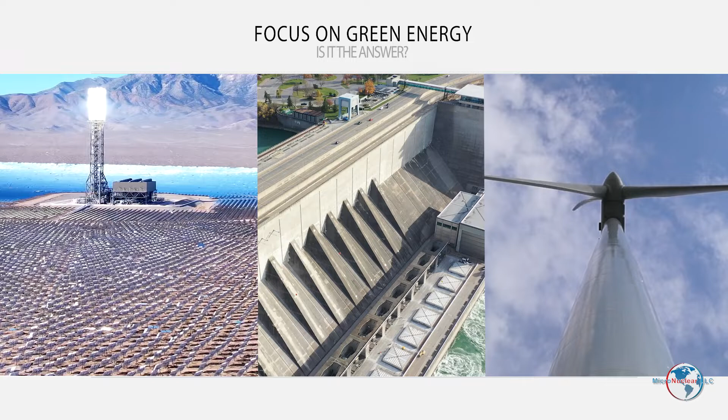Energy. The last several decades have witnessed a tectonic shift in the discussions of how we ensure the future of our energy supply. Today's media is focused on green energy as the answer to the elimination of fossil fuels. The public's perception of the viability of this green energy is often driven by political agendas, misinformation, and climate change focus that promote scientifically unattainable goals.

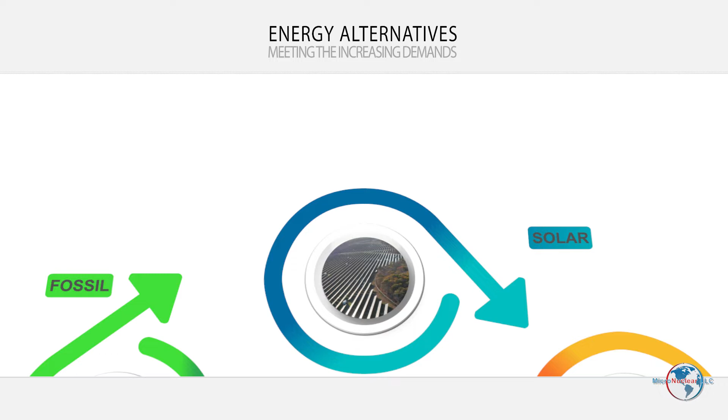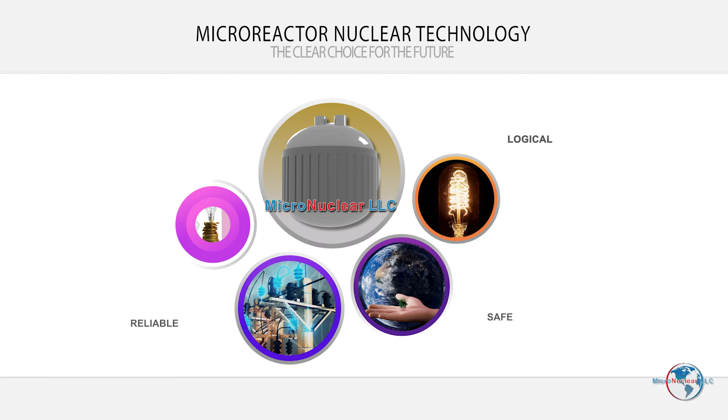When we examine the current realities of all forms of energy production, it becomes clear that only one technology has all the capabilities to meet the increasing demands of our planet: microreactor nuclear technology. This new type of reactor, from America's MicroNuclear LLC, employs a molten salt nuclear battery that, in a few short years, will be supplying a logical, safe, reliable, and economical solution that also resolves the issue of nuclear waste disposal.

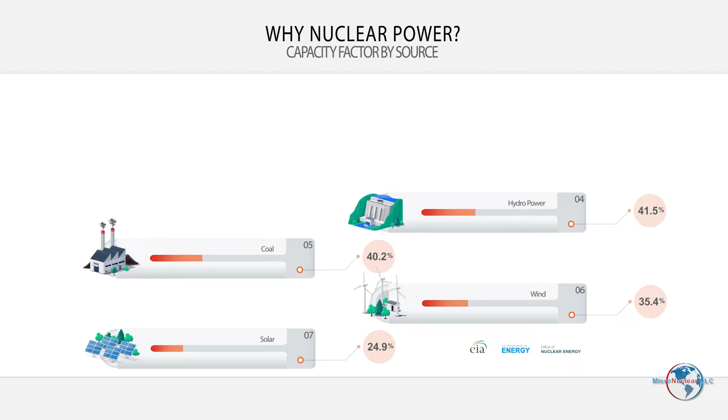To understand how transformative molten salt nuclear battery technology is, it is important to look closely at the specific requirements of competing technologies in their attempt to reach a goal of reliable, emission-free, environmentally friendly energy that is sustainable, reliable, and affordable. Capacity factors of these different technologies vary greatly, but none comes to the capacity of nuclear power, which is by far the most reliable and efficient.

The environmental and societal impact of generating facilities is massive. For example, a wind farm requires over 2,700 acres, while a solar farm can demand over 500 acres to produce the same 10 megawatt output as a quarter acre facility that houses a molten salt nuclear battery.

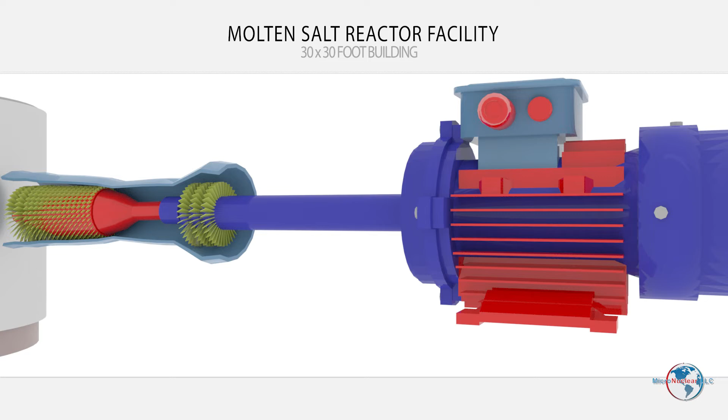This is possible because the reactor vault and the commercial load equipment can be contained in as little as a 30-foot by 30-foot building installed above or below ground.

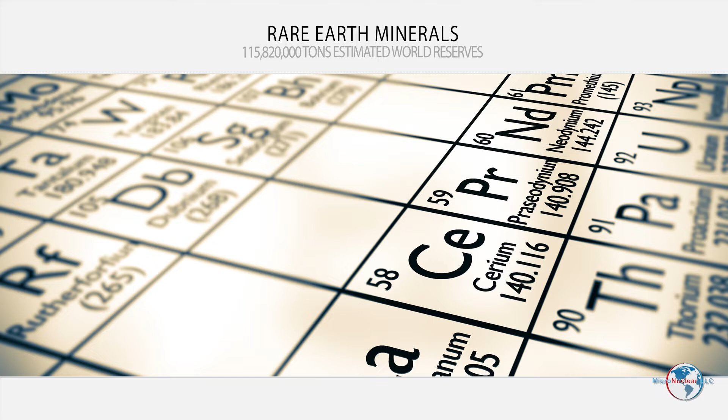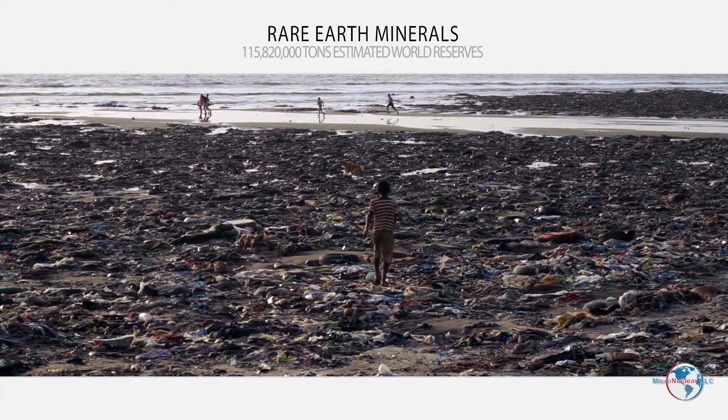Additionally, the reliance upon foreign sources for rare earth elements for battery production means energy security can be severely crippled by geopolitical events, while mining practices produce environmental and humanitarian crises around the world. The examination of all these facts make the conclusion of the importance of nuclear power undeniable.

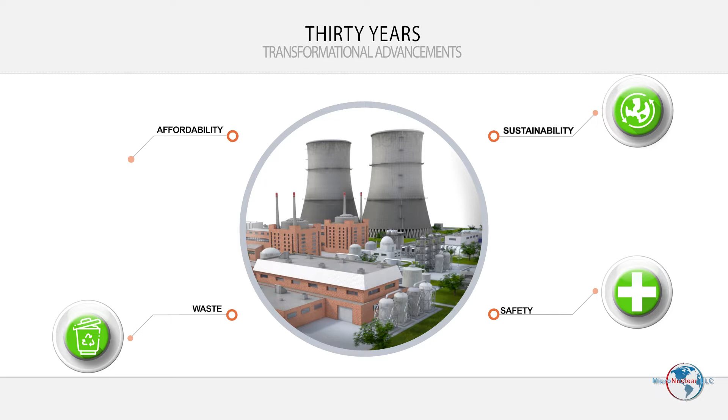But for over 6 decades, the perception of nuclear energy has remained unchanged, as the U.S. has failed to take advantage of the transformational advancements made in nuclear power science and technology over the last 30 years. The molten salt nuclear battery from MicroNuclear LLC will alter that course.

At MicroNuclear, our primary objective is to revitalize and secure our energy needs using proven and safe technology that not only solves our existing energy needs, but opens an essentially unlimited potential to advance the security, reliability, and availability of our future energy needs.

Molten salt nuclear reactor technology is not a new concept, but one whose feasibility has been proven for decades, and the recent re-examination of that concept by MicroNuclear provides innovative design solutions that will change the entire energy infrastructure. To easily understand the difference between the molten salt nuclear battery and the traditional nuclear power plant, let's look at the operating flow chart of both systems.

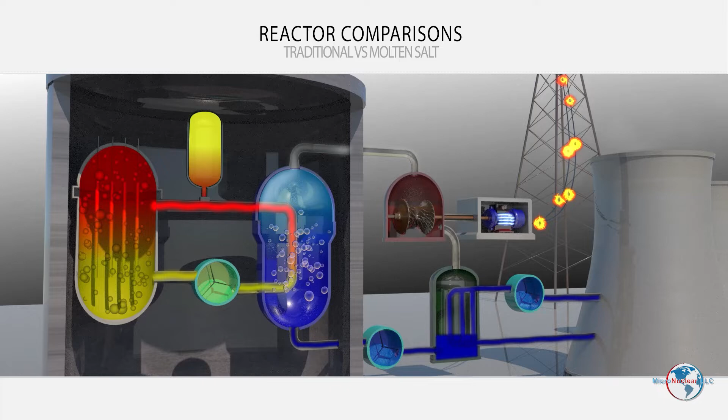Traditional and current nuclear power plants are referred to as light water reactor systems with several components, including a solid core reactor, pressurizer, coolant pumps and loops, steam generators, turbine generators, cooling towers, and more. These systems can reliably generate large amounts of electricity. 1,000 megawatts are not unusual.

But those power plants require a large amount of land to do so, along with a complex operating system and support resources, many operational staff, and are very expensive to build and maintain. Light water nuclear reactors are safe and reliable. However, they do produce questions of its sustainability with radioactive water, expended core disposal, and nuclear waste.

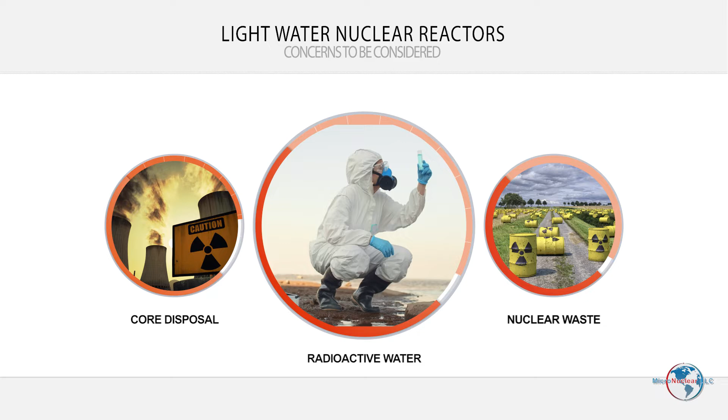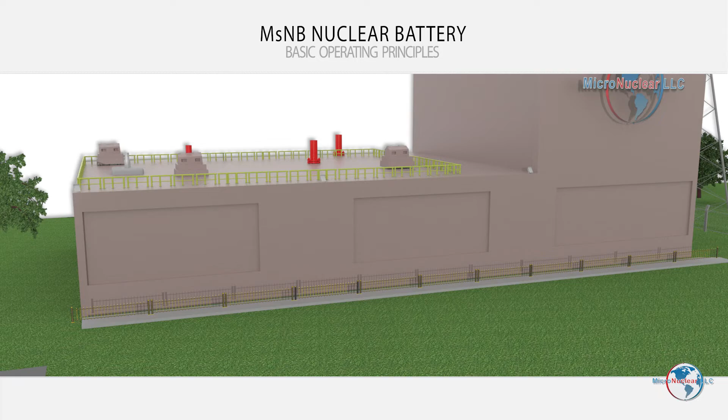Molten salt technology addresses, solves, and reverses these conceptions. The basic operating principle is simple. The reactor core of the molten salt nuclear battery, or MSNB, is, as the name implies, a molten mix of nuclear fuel and a chemical salt.

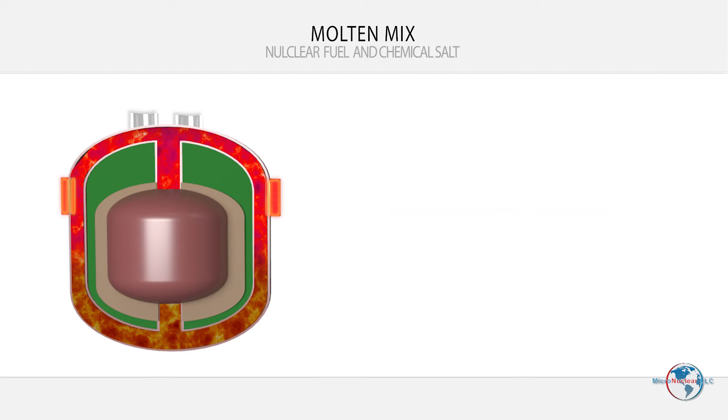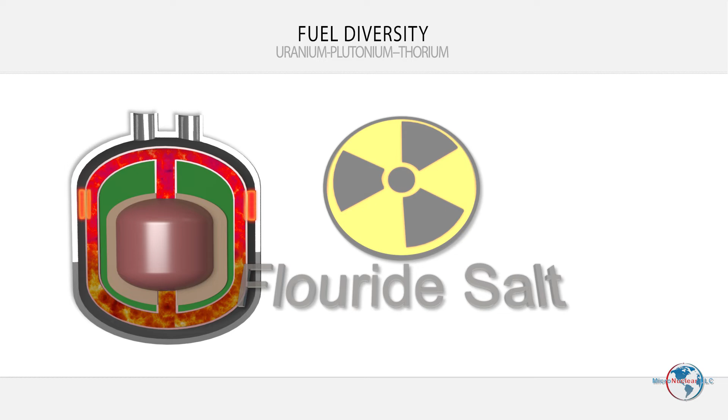The salt in the MSNB is not your sodium chloride table salt. Instead, the MSNB uses fluoride salt because of its desirable characteristics when mixed with a nuclear fuel. As for the nuclear fuel in the MSNB, it can use either uranium or plutonium, and it can also run on fuel provided by thorium.

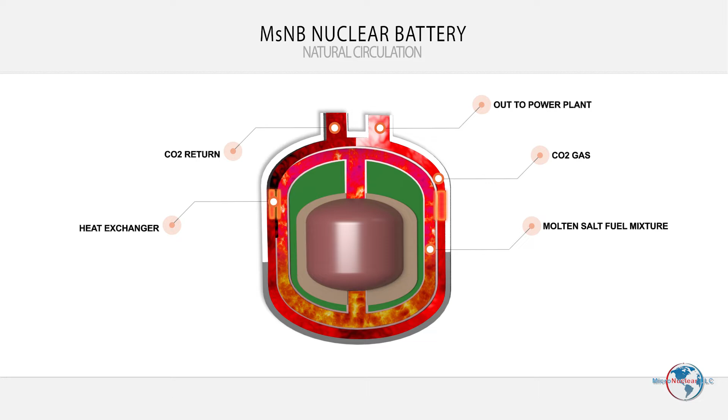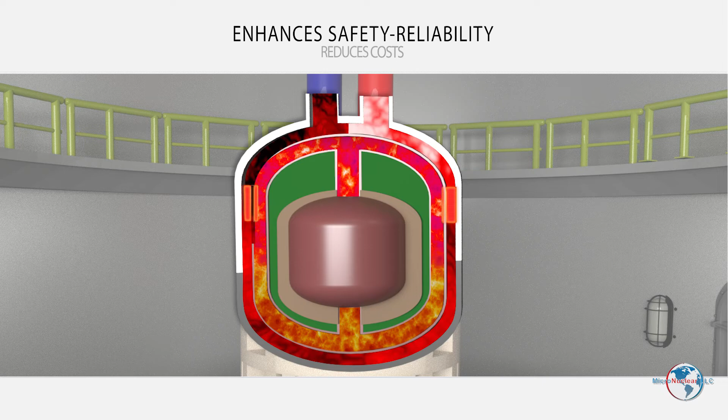Most importantly, the MSNB uses natural circulation to move the molten salt fuel through the reactor core and is thus designed without the need for pumps, valves, or coolant loops. The elimination of each of these components enhances safety and reliability while it reduces cost.

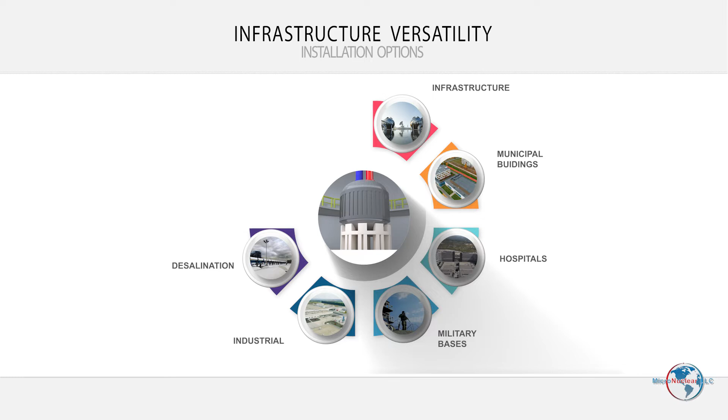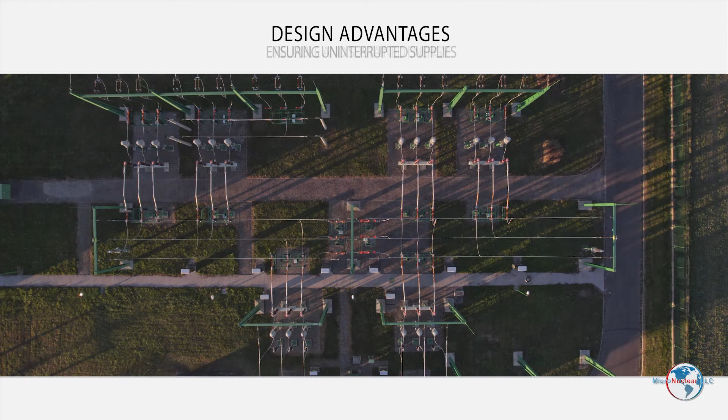It can be installed in critical infrastructure such as municipal buildings, hospitals, and military bases. It is ideal for industrial applications, desalination facilities, hydrogen production, and remote villages. The MSNB is designed to provide reliable and sustained energy, securing the absolute requirement of uninterrupted supply of energy.

Additionally, the MSNB development is mature. It is ready to produce the first prototype, be fueled with molten salt, and undergo operational validation.

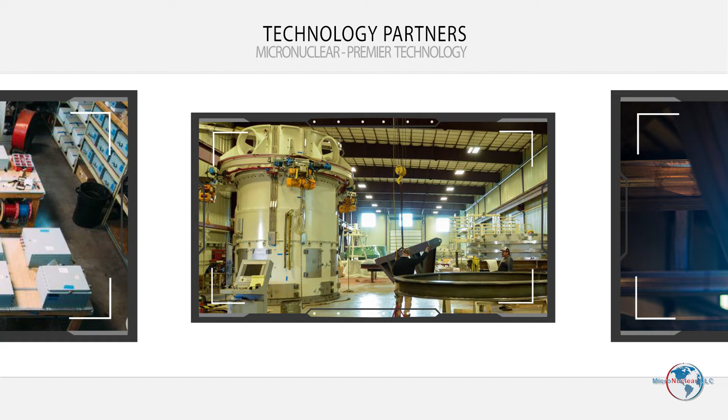Premier Technology is an industry-leading manufacturer of nuclear-grade equipment. Premier has supported MicroNuclear with the manufacturing of concept-stage prototypes and has the facilities, personnel, and experience needed for full-scale production.

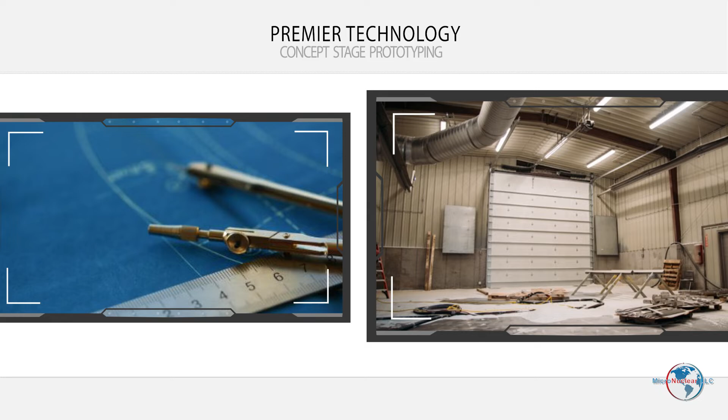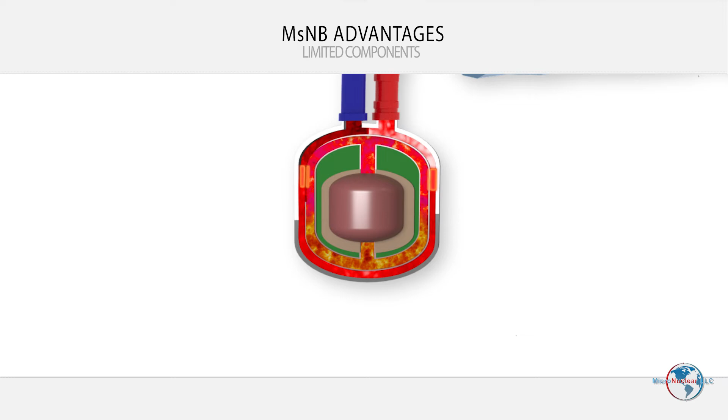Understandably, any discussion of nuclear energy centers on safety and nuclear waste disposal. As we have said, unlike current nuclear power plants, the MSNB has no pumps, valves, coolant loops, and uses natural circulation with a molten salt nuclear fuel. It does not use traditional highly pressurized water for cooling.

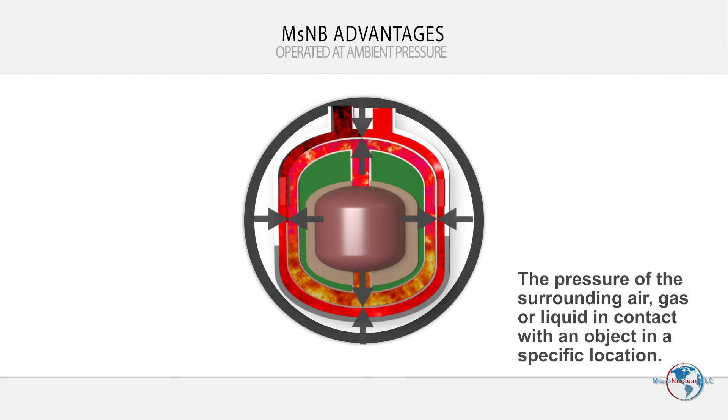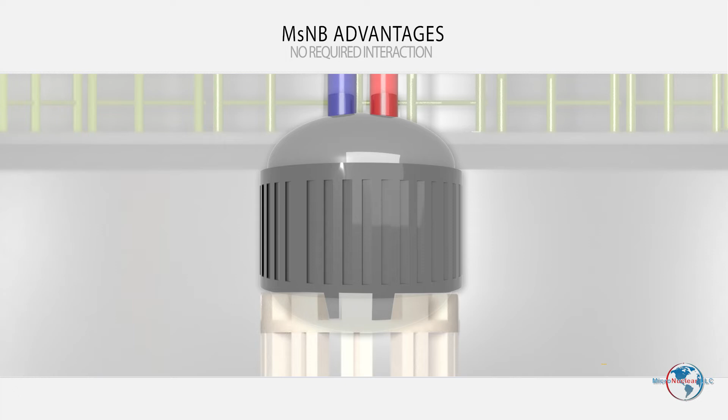Instead, the MSNB operates at ambient pressure, and if the intended use of the MSNB becomes inoperative or is shut down, the MSNB simply and safely goes into a hot standby condition. The process is so inherently safe in its design that no action is required on the part of an operator. This means the MSNB is walk-away safe.

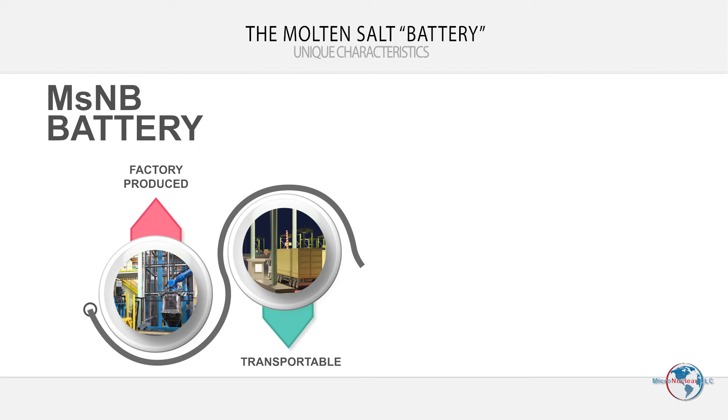We refer to the MSNB as a battery because it is manufactured in a factory, transported to the site, installed, and at the end of its 10-year life is simply replaced with a new MSNB.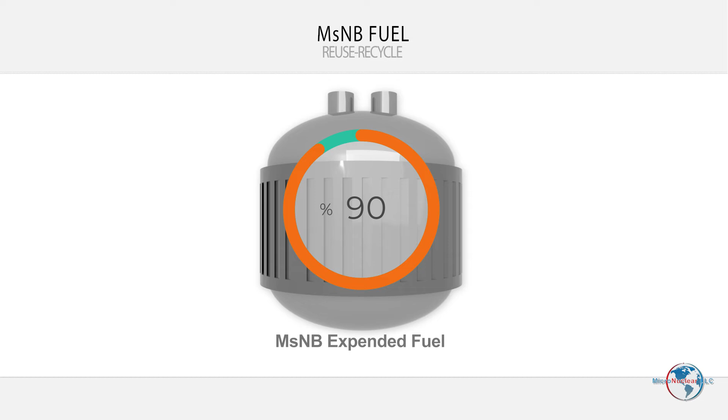Unique to this technology is that 90% of the expended fuel can be reused in subsequent MSNBs. In addition, the leftover 10% are products that will be separated from the salt and will have valuable commercial medical uses.

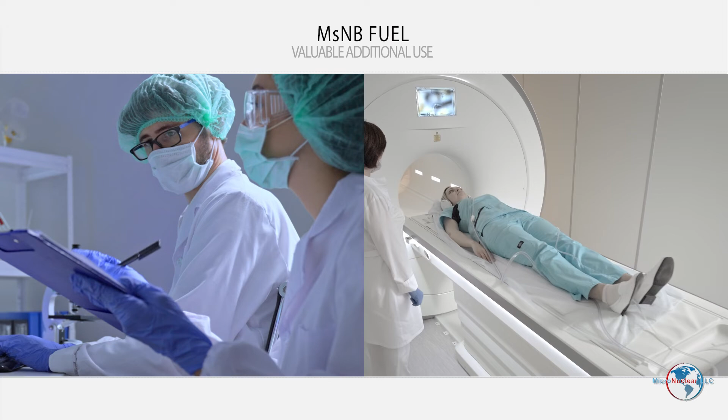The remaining waste, amounting to only a few kilograms, is safely disposed of in a repository until levels are essentially the same natural background radiation level that you experience every day. Comparing this to the tons of waste from an expended solid reactor core, the benefits of the molten salt nuclear battery are undeniable. The need for a long-term sustainable energy plan is inarguable.

There is no other path to a green, emission-free, feasible, and proven scientific solution besides nuclear. We have learned it is the molten salt nuclear battery that can logically and scientifically overcome preconceived objections and bring us to the energy solution we need.

We have learned that MicroNuclear has designed the MSNB to recycle nuclear fuel, essentially nullify the nuclear waste disposal issue, be economical, be near-term available, and most importantly, be safe. Walk away safe.